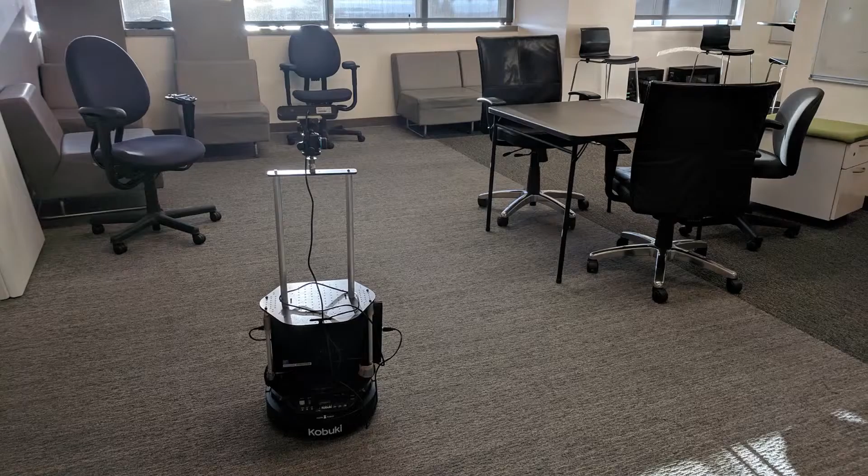Autonomous vehicles operating in the real world must navigate through novel, a priori unknown environments using onboard, limited-range sensors. As a vehicle makes progress towards a goal and receives new sensor information about the environment, rigorous safety analysis is critical to ensure that the system's behavior does not lead to dangerous collisions.

However, there are several challenges to providing safety guarantees in unknown environments. The first is ensuring safety with respect to unsensed parts of the environment. This safety analysis should also be applicable to a wide variety of real-world sensors. Finally, updating the safety assurances in real time based on new observations poses computational challenges.

In this work, we propose a novel, real-time safety analysis method based on Hamilton-Jacobi Reachability that provides strong safety guarantees in unknown environments. Our safety method is planner agnostic and provides guarantees for a variety of real-world mapping sensors.

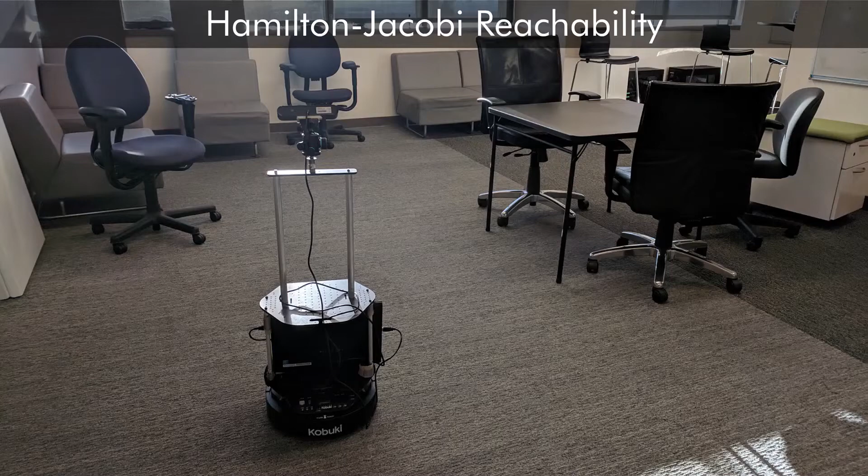Our framework is based on Hamilton-Jacobi Reachability, which is a safety analysis tool that can be used for nonlinear dynamics and can account for external disturbances.

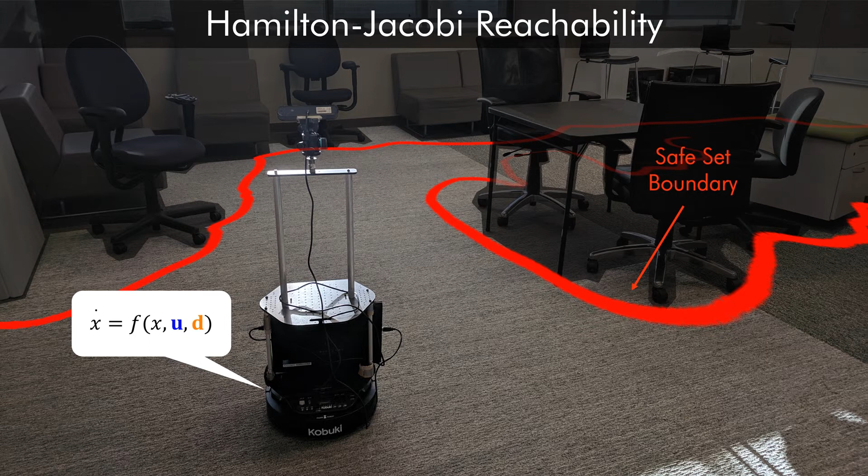In reachability analysis, we are interested in computing the backwards reachable set, which is the set of all states such that system trajectories that start from this set can eventually enter an unsafe set of states for some disturbance, even despite the best control effort. The complement of this set is thus the safe set of the vehicle. If the vehicle trajectory starts from this safe set, then there exists a control such that the system will never enter the unsafe set, despite the worst-case disturbance.

Moreover, reachability analysis also provides a corresponding safe controller. Before understanding the benefits and drawbacks of reachability for navigation in unknown environments, let's first see how we can compute a backwards reachable set in a little bit more detail.

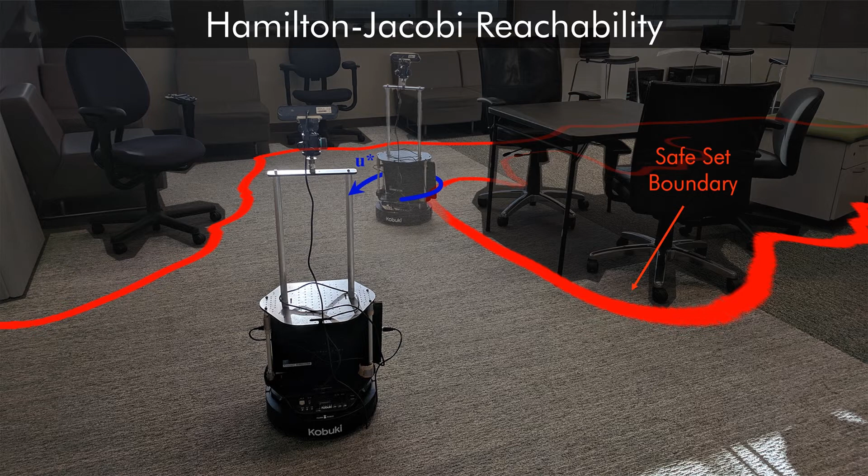As a running example, let's consider a Turtlebot robot that is navigating through an indoor environment with furniture and clutter. We want to guarantee that the robot does not collide with any obstacles.

The first step in HJ reachability analysis is to define a dynamics model for the robot. Here, the model describes the evolution of the Turtlebot's XY position, as well as its velocity and heading and external disturbances dx and dy.

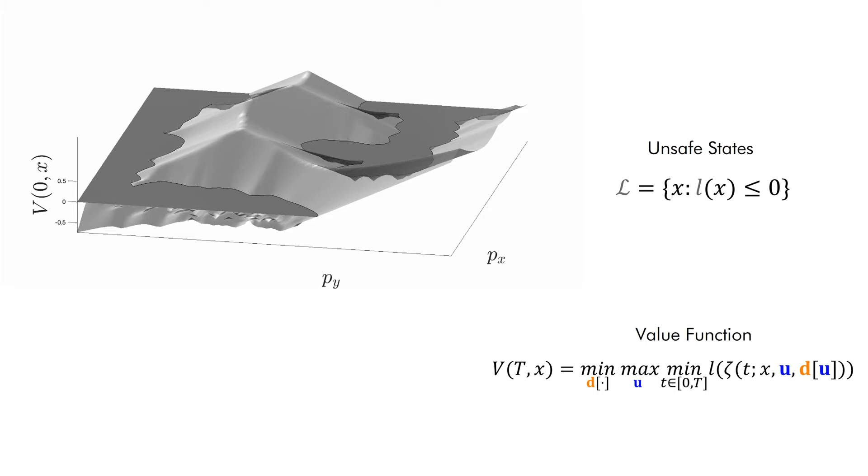One way to solve this is via the principle of dynamic programming, which, when applied to continuous state and time, results in the Hamilton-Jacobi variational inequality. In this formulation, the Hamiltonian encodes the effect of system dynamics, control, and disturbance on the value. This Hamiltonian is responsible for the value propagation, where the control tries to increase the value or move the system away from unsafe states, and the disturbance moves the system towards the unsafe states.

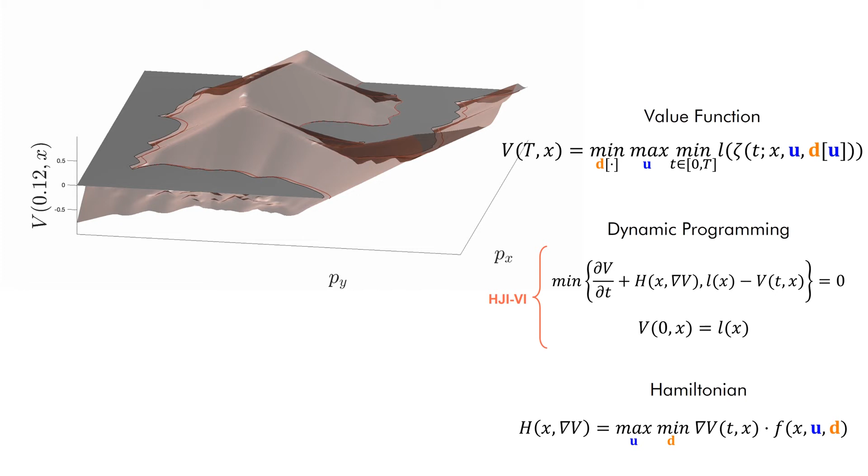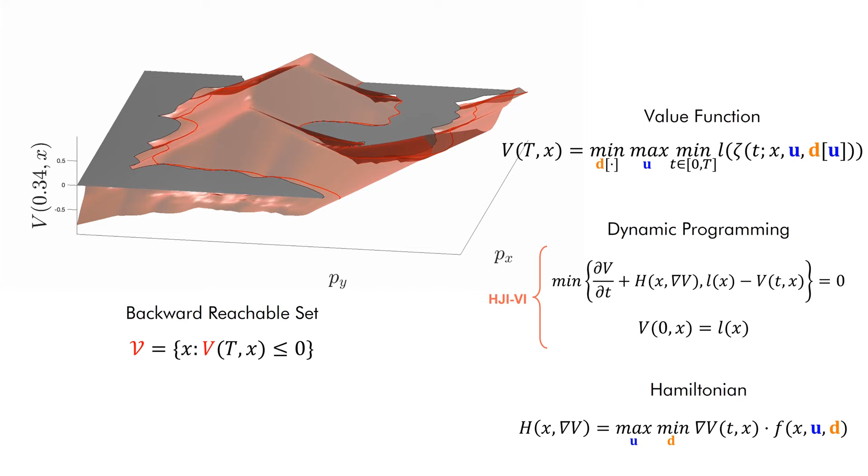The backwards reachable set can be obtained by value propagation starting from L of x. After convergence, the sub-zero level set of this value function gives us the backwards reachable set. Thus, as long as we are inside the red boundary, our system is safe. Once we have the value function, we can also obtain the optimal controller to keep the system inside of the safe set.

Unfortunately, as mentioned before, many real-world systems do not have access to maps of the environment a priori to compute these reachable sets. Furthermore, due to the computationally expensive nature of dynamic programming computations, HJ reachability has not been leveraged in settings where the robot does not know the environment beforehand and rather must sense it at runtime.

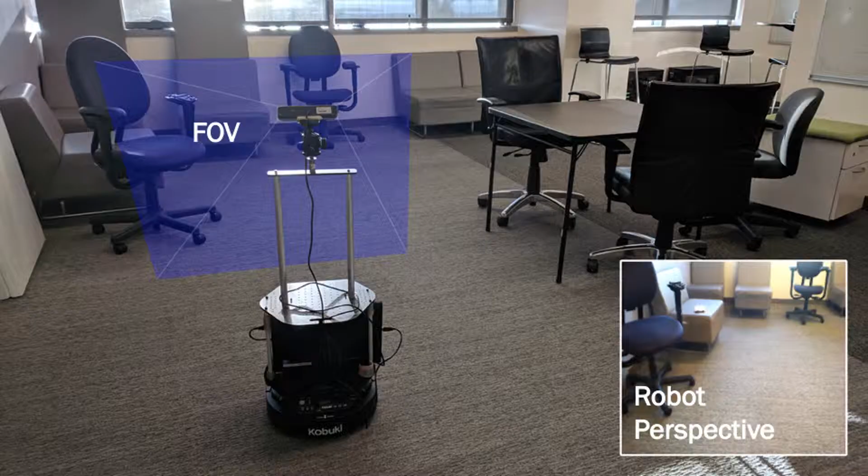We are going to propose several modifications to the reachability safety framework to overcome these challenges. If we recall our safety challenges from before, let's focus on the first two: safety despite unseen obstacles, and safety for arbitrary sensors.

To understand our proposed framework, let's consider a simple example. Here, we simulate a 3D Dubins car with position x, y, and heading theta that has a front-facing camera. The area marked in blue is sensed initial free space, green is the goal location, and gray is a priori unknown obstacle in the environment.

When nothing is known about the environment, we first denote that everything that is unseen to be an obstacle. This allows us to provide safety guarantees despite all of the unseen obstacles. Of course, later on, as the robot moves through the environment, we will take the environment observations into account and update our belief map of the environment accordingly.

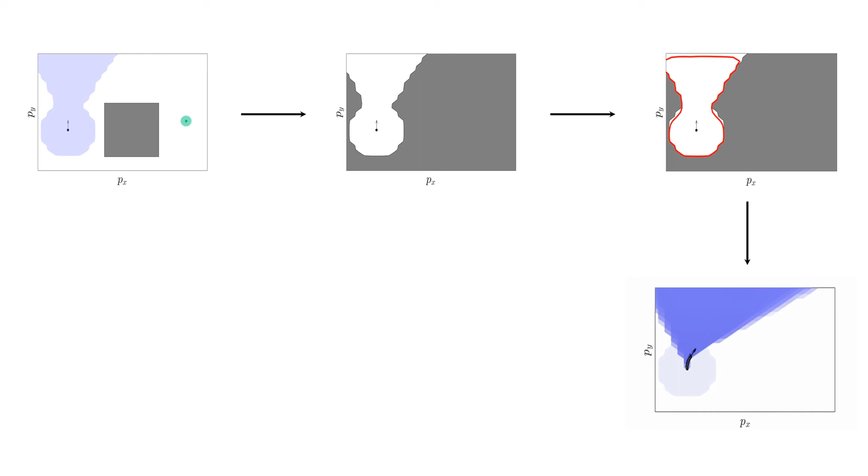This initial obstacle map defines our set of unsafe states, from which we can use HJ reachability to compute the backwards reachable set. The vehicle now executes some planned controls, during which it collects new information about the environment. Since it's sensed more free space, the obstacle map is updated, as is the corresponding safe set.

Although we assume that the perception is accurate in the field of view, which is hard to ensure in the real world, we do not have to make any explicit assumptions about the shape of the sensed region and the number or shape of obstacles in the environment. Importantly, this procedure ensures safety despite the unseen parts of the environment and works for a variety of real-world sensors and planners.

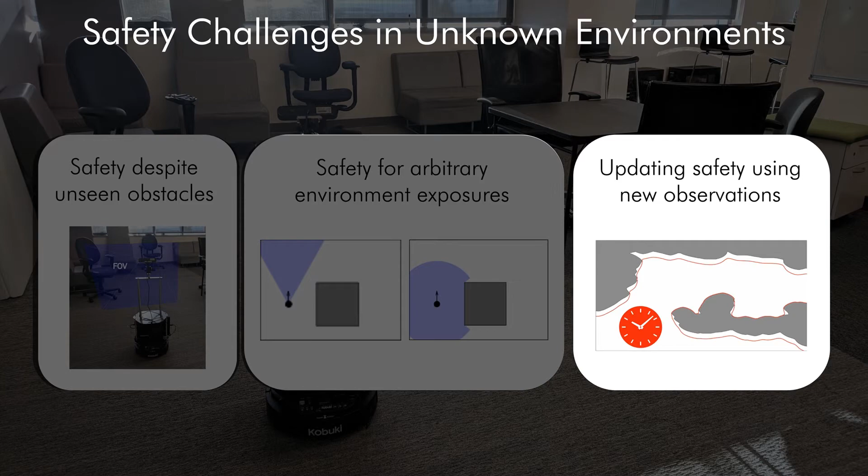Now, how do we update the safe set online based on new observations? To mitigate some of the computational challenges, we introduced two novel approaches to computing the backwards reachable set: warm starting and local value function updates.

Let's look back at the initial example. Here, gray is the current belief obstacle, and the vehicle is facing forwards. Given this information, we compute a value function, denoted by V_OLD.

At any given time, after the car has applied some planning control, the vehicle senses only a small additional part of the environment. Consequently, the free space map and the corresponding L of x function only changes by a small amount in the small time horizon.

We could recompute the entire value function with the new L of x, but intuitively this should only cause a small change in the safe region.

Rather than starting the computation from scratch, we leverage this intuition to warm start the value function computation with the old value function. We can solve the dynamic programming problem once again to obtain a new value function and corresponding safe set. Importantly, warm starting leads to a much faster computation of the backwards reachable set because the value function needs to be updated only for a much smaller number of states that are newly found to be free. At all other states, the value function is already almost accurate and only small refinements are required.

We show that this procedure maintains the conservativeness of the safe set. In particular, the obtained safe set through this procedure is a guaranteed under-approximation of the true safe set of the vehicle.

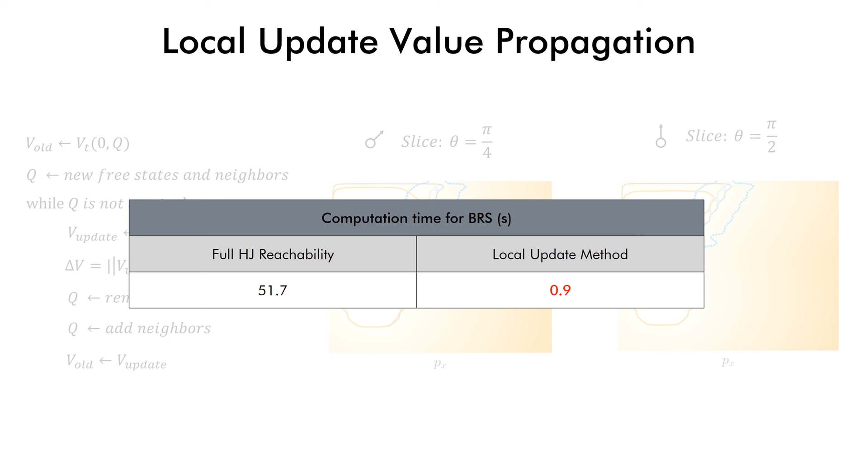With this online safe navigation framework, we can now very quickly recompute the set of safe states for arbitrary limited range sensors and for any given planner. To test the proposed approach in hardware, we use a Turtlebot 2 with a mounted stereo RGB camera and showcase how the safety framework can be used to provide assurances around a learning-based planner.

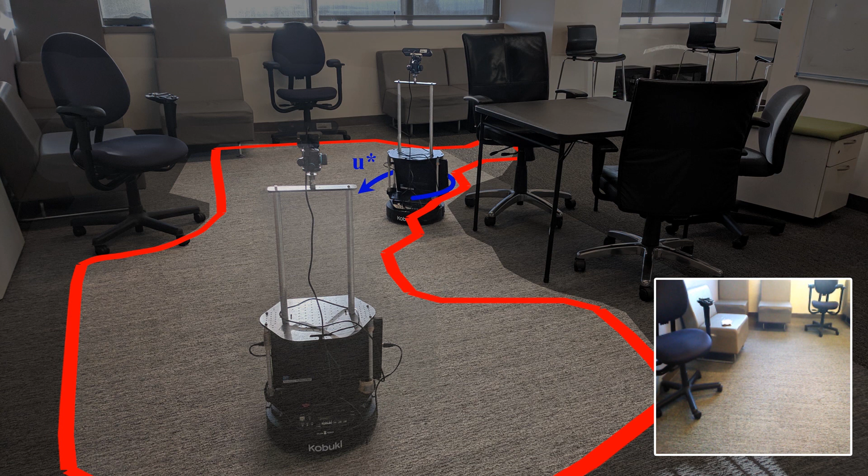Here, the vehicle needs to navigate through a cluttered, indoor environment to a goal position. Since the environment is sensed only through the camera, the dark part of the environment is currently unknown to the robot. To navigate the robot towards the goal, we use a learning-based planner, which uses a convolutional neural network to make planning decisions based on the current observed RGB image.

Without the safety controller, the learning-based planner struggles with making sharp turns near the corner and eventually collides into the obstacle, in this case the chair.

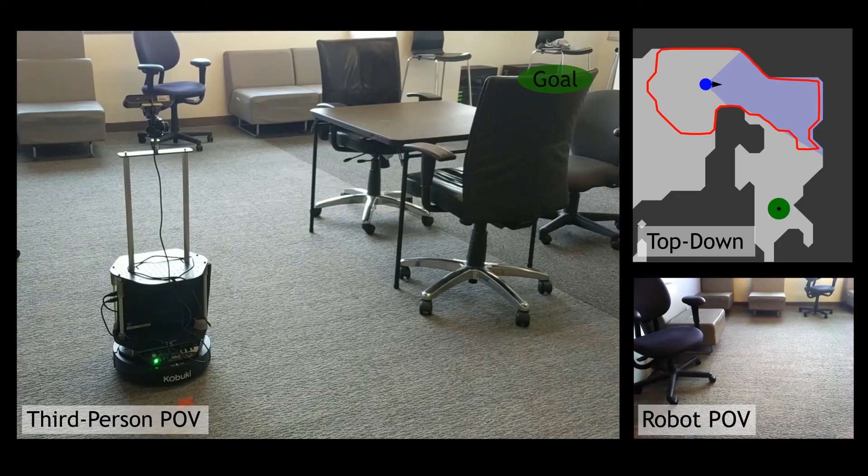However, when the learning-based planner is used with the proposed safety framework, the safety controller is able to account for this unsafe situation and safely steer the vehicle away from the obstacle.

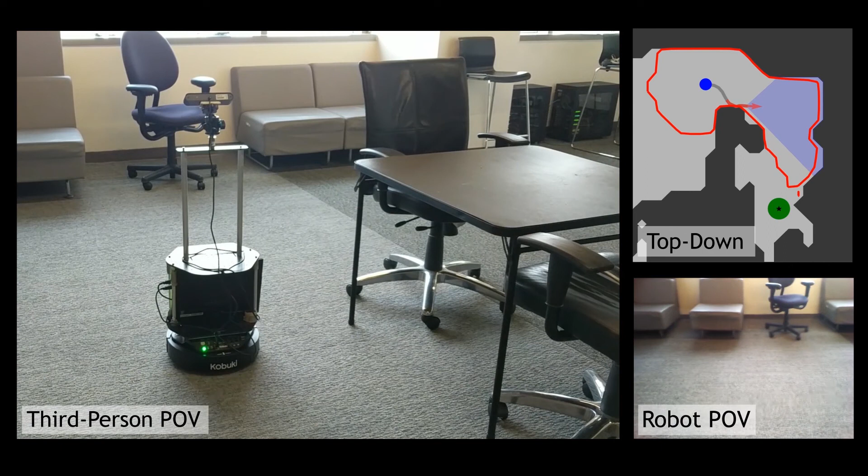We show the safe set of the vehicle in red, which is being updated online using the proposed local update method. When the vehicle is on the boundary of the safe set, the safety controller intervenes and steers the system away from the obstacles. Afterwards, the planner takes over and steers the vehicle towards the goal.

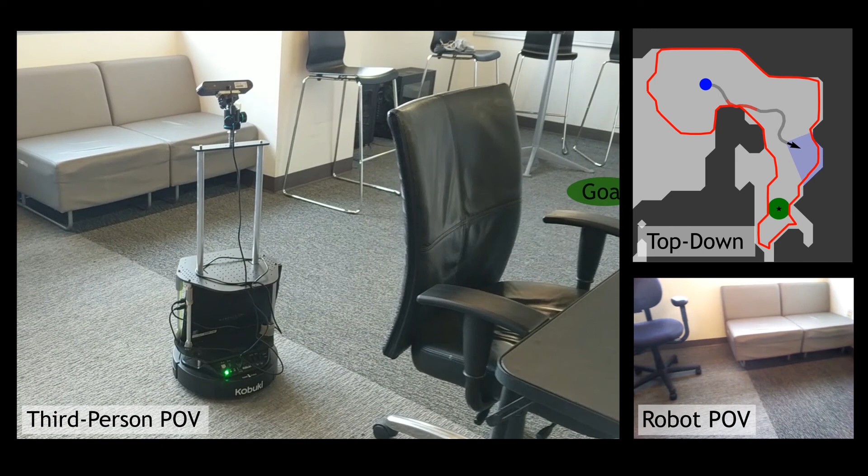Our framework can also be used to ensure safety for a variety of learning-based planners, which is typically very challenging to do.

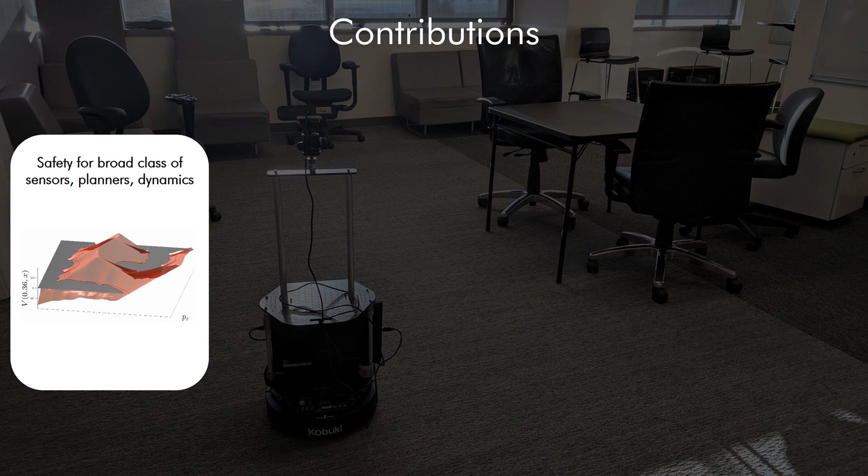To summarize, our contributions are: a framework which provides safety in static, unknown environments for a broad class of sensors, planners, and dynamics; an algorithm for online safe set updates from new sensor measurements; simulations of our approach on a variety of sensors and planners on a vehicle with nonlinear dynamics and in the presence of external disturbances; and finally, demonstration in hardware to provide safety around a state-of-the-art learning-based planner which uses only monocular RGB images for planning.